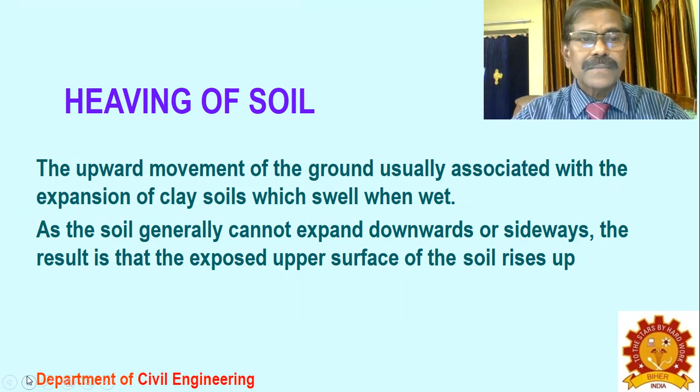Heaving of soil means the upward movement of the ground, usually associated with the expansion of clayey soil, which swells when wet. As the soil generally cannot expand downwards or sideways, the result is that the exposed upper surface of the soil rises in its level. As a result, the soil swells abnormally, which causes damage to the foundations. So this we call heaving of soil.

There are different types of heaving. The shrinkable clays, or soils containing a large portion of mineral particles less than 0.002 mm in diameter, produce an extremely cohesive soil type when wet, but shrink to a crumbly, crazed structure when dry. This expansion and contraction process during wet and dry periods is known as clay heave.

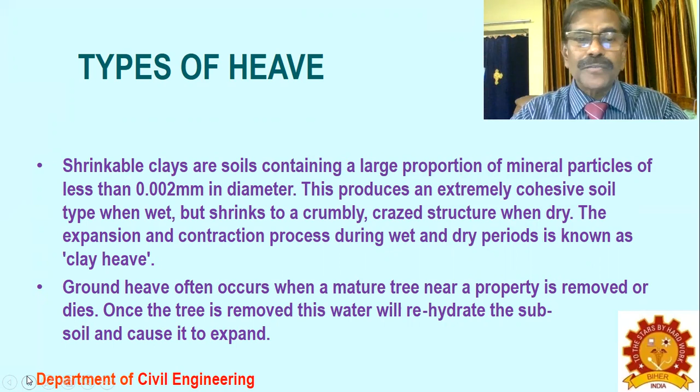Ground heave often occurs when a mature tree near the property is removed or dies. Once the tree is removed, water rehydrates the subsoil and causes it to expand, because the soil moisture used by the tree is no longer being used. As a result, the soil swells and causes damage to the foundations. So these are different types of heave.

Heave prediction: how do you predict the heave? What will happen when the structure is constructed on heaving soil? How does the expansion of the soil take place, and what are its implications on foundations? These things can be identified if you know how to predict the heave.

Reasonable estimates of anticipated vertical and horizontal heave and differential heave are necessary for the following applications. What are the applications? Determination of adequate design of structures that will accommodate the differential soil movement without undue distress.

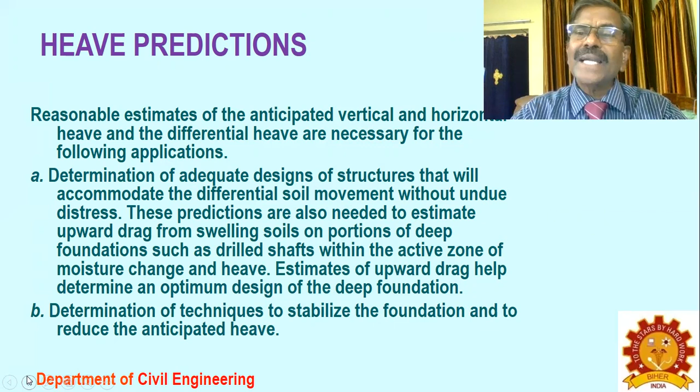Undue distress means no cracks are expected or visible cracks should not be seen on the structures. These predictions are also needed to estimate the upward drag from the swelling soil on portions of deep foundations, and to determine techniques to stabilize the foundation and reduce the anticipated heave. So that's how heave prediction becomes essentially needed.

Factors influencing heave: the difficulty of predicting potential heave is complicated beyond these factors by the effect of the type and geometry of foundation, depth of footing, and distribution of load exerted by the footing on the magnitude of the swelling expansive foundation soil. So these are some of the factors which severely influence the heave factors of the soil.

Additional problems include estimating the exact location that the swelling soil will heave, or the point source of the water seeping into the swelling soil, and the final or equilibrium moisture profile in the area of the heaving soil.

Heaving soil is generally fine-grained soil of varying types, like clay soil, peat, or black cotton soil. This will swell abnormally when the moisture content increases, because the increase in volume cannot be accommodated below the earth level. It expands on the surface of the soil, pushing up the structure standing on it, causing undue damage and cracks in the building. That is what you call heaving of the soil.

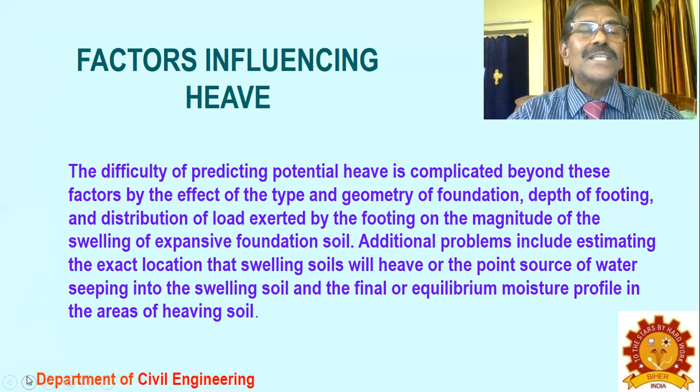This can happen when a tree is cut down, or when moisture is lost, or when extra moisture is added. Then you will feel that the heaving of the soil has an effect on the structures.

The method of heave prediction: how can heave predictions be done? There are two or three methods available. We cover broadly one or two methods here. Basically, they are all empirical methods.

The foundation soil may expand both vertically and laterally. The vertical movement is usually of primary interest—we are much more interested in it than the lateral movement, which can be accommodated by the structure—because it is the differential vertical movement that causes most damage to the overlying structure.

As I said earlier, the vertical deformation or swelling of the soil has a direct effect or impact on the structure sitting on it, as a result of which the structure is badly affected. So we are very much interested in the vertical heaving, which is sometimes called the heave potential of the soil.

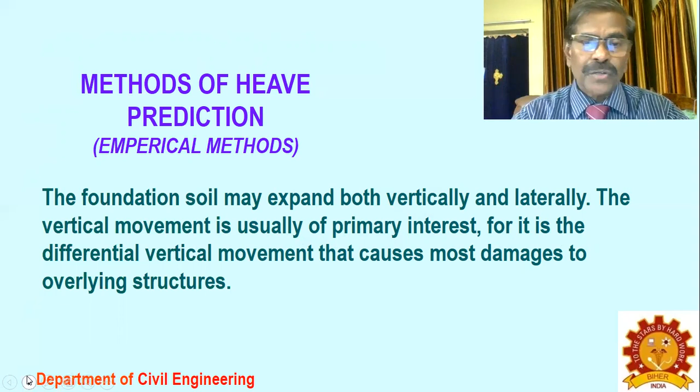Methods of heave prediction, the vertical movement. The methodology for the prediction of the potential total vertical heave requires an assumption of the amount of volume changes that occurs in the vertical direction.

The fraction of volumetric swell, or N, that occurs as heave in the vertical direction depends on the soil fabric and anisotropy. Anisotropy means there can be a differential expansion or differential swelling possible in the soil. So in the vertical direction it may be more, in the lateral direction it may be more, or sometimes it may be vice versa. You call it anisotropy.

The vertical heave of the intact soil with a few fissures may account for all of the volumetric swell, such that N is equal to 1.

While vertical heave of the heavily fissured and isotropic soil without horizontal restraints on the soil swells that exist in the field, a one-dimensional consolidation swell test can predict the heave very nearly to the accuracy.

So the consolidometer used for heave prediction is also termed an oedometer. The oedometer is used to predict the swell of the soil. Let us see how this is predicted using the oedometer.

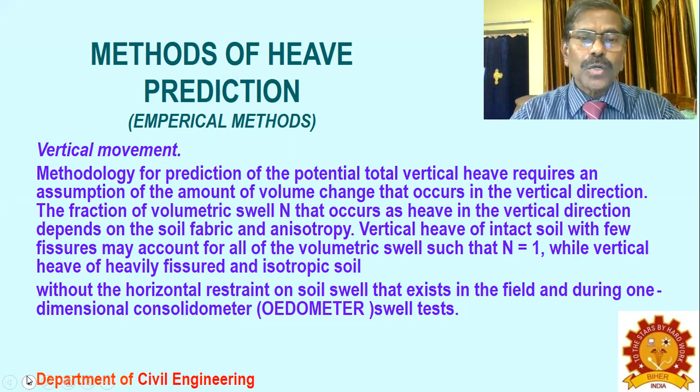An oedometer is a device to find out the vertical swell of the soil. The soil which is required to be understood should be kept in a ring specimen. So what you call the test sample, this is a ring, in the form of a ring. Inside the ring, the test sample is kept.

Then a load is applied, a calculated load, so that the soil is under stress. This simulates the foundation stress on the soil. It is just to simulate the foundation load on the soil.

Now the loaded soil is supplied with water or moisture content, so that the moisture content increases and the swell increases. When the swell increases, there is an increase in elongation along the vertical direction. The increase in vertical elongation divided by the original length is called the strain in the soil. So there is a stress in the soil, there is a strain in the soil, and there is a water content in the soil. All these three parameters are measured in the oedometer.

This is another, simplest form of the oedometer. This is a more expensive form where the moisture content can be controlled. Here you send the moisture control through a porous media, and the porous media controls the pressure of the soil and water content, which is then taken out by a drain pipe from the porous media. That is how the drainage path, or drainage, is controlled in the test specimen.

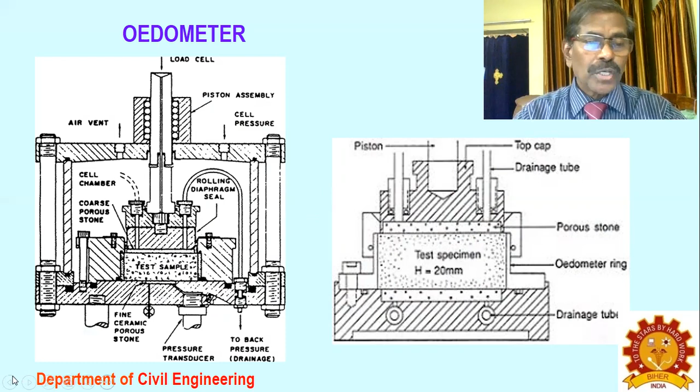The oedometer test and the heave prediction. Numerous numerical methods have been developed for the estimation of heave, or swell, in the vertical direction.

But few of these methods have been validated experimentally, and there is a limited amount of experience regarding the reliability of the available prediction methods. Though a lot of empirical methods are being adopted, the reliability is very limited, applicable for certain items only, certain values with certain procedural usage of the equipment.

Those one or two reliable methods we are presenting here for the oedometer test to predict the heave. This is a popular test for measuring swell potential and swelling pressure, and the testing equipment is commonly available in most soil mechanics laboratories. Due to the simplicity of its operation, most geotechnical engineers are familiar with the testing method because it is very similar to the consolidometer.

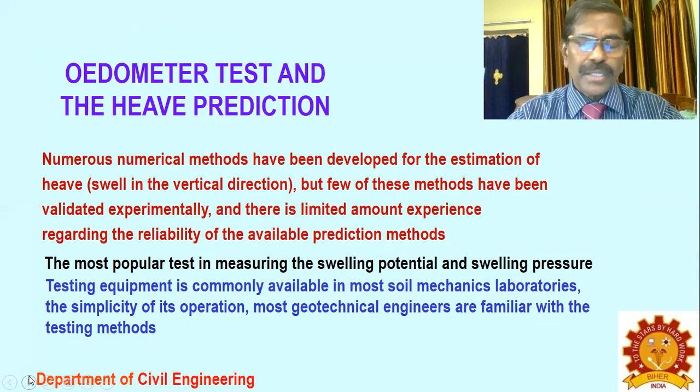The consolidometer is used to find out the initial settlement and final settlement of the soil. It is very nearly equal to that, and it is called the oedometer because it is used for predicting the heave of the soil, not exactly the consolidation.

The heave prediction method: the Marr et al. method. 'Et al.' means other authors' work is also involved. Marr et al. proposed a practical method to predict the vertical movement, or heave, of the soil based on the change in water content. A simple method for predicting the vertical strain, epsilon V, as a function of change in water content, delta W, at a given total applied vertical stress.

At a given sigma V, the vertical movement delta H can be found, which is the ground surface movement, equal to H naught, the thickness of the soil layer, multiplied by delta W, the change in water content, and C epsilon W, the slope of the swelling line.

The slope of the swelling line, you get it from the oedometer. Let us go into the depth of the subject, how to find out the slope of the swelling line.

This is one of the components used in the Marr et al. method. Along with that, you use the ground surface movement and thickness of the soil layer, then change in water content to predict delta H, the ground surface movement.

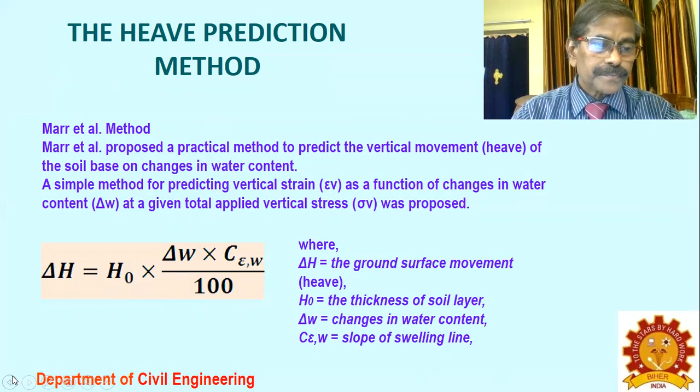That formula, if you are interested, see epsilon W. It is not E, it is epsilon W. So that is the slope of the line CH.

We can use 3 specimens at a time to get the heave prediction values. This is another oedometer. You use it for the purpose of finding the heave predictions.

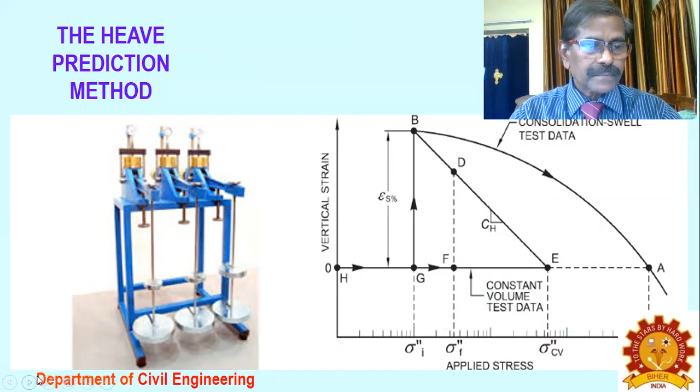There is another method called the Nelson et al. method, wherein CH is equal to percentage of S times log of sigma prime CV over sigma prime i A. And delta H again uses the CH value here.

It's log of sigma prime CV and sigma prime VO, which is a stress level. Then H is the thickness of the layer. CH is a constant from the oedometer test.

This is that value. Percentage of S is the percentage of swell corresponding to a particular value of sigma prime, expressed as a percentage. CH is a heave index, and sigma prime CV is the swelling pressure from the constant swell test.

Sigma prime V naught is the vertical stress at the midpoint of the soil layer for the condition for which the heave is being computed. So there is V naught, sigma CV, and the swelling pressure from the constant swell test.

Using these stress values, the log value is taken as a constant. Along with CH, the slope of the line, and the thickness of the swelling layer, you multiply to get delta H, which is the swell potential or swelling value for the soil.

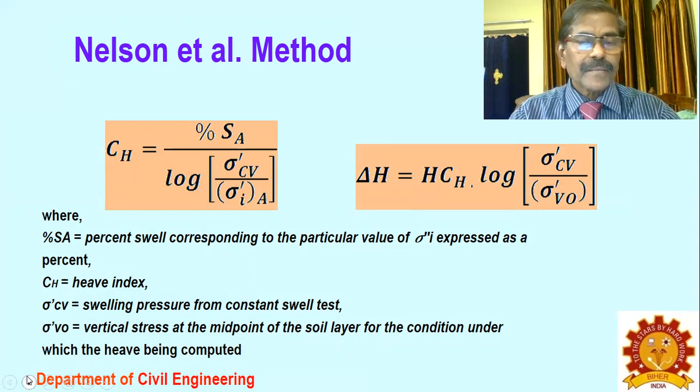If you change the water content with an applied stress, for example 3.3 kilopascals, you apply a load, shown along these lines.

If you apply some load and then increase the water content of the soil in the oedometer, swelling will take place. The increase in vertical height divided by the original height of the soil specimen gives the vertical strain of the specimen. For example, at 20% moisture content you measure the strain.

At 25% you measure the strain, and at 30% you measure the strain. You plot these and draw an average graph. It is a straight line graph.

Now you apply another load of 8.8 kilopascals. You again plot this and get another line, the black dots. Then you increase the load to 12.5 kilopascals, and again increase the water content to get the vertical strain.

You get another line. So as the vertical stress increases, the slope of the line decreases, which tells you that when the vertical stress is very heavy, swelling is automatically arrested because of the very high pressure from the other end.

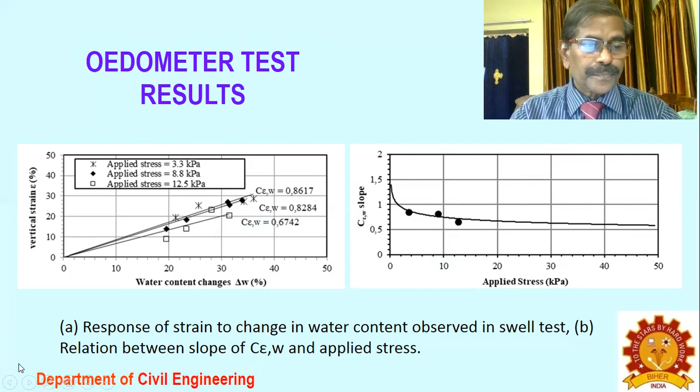If you use some of these methods, you can draw a comparative graph for research purposes. HEAVE occurred on the test, and on the test you can get some value. What is HEAVE occurred? There is another test, prediction of HEAVE using the Nelson et al. method, and prediction of HEAVE using the Marr et al. method. If you compare, they are very nearly equal.

So the Marr et al. method, actual experiment, as well as Nelson et al. method, very closely follow the experimental values. So we conclude these two methods are more reliable to predict the HEAVE or HEAVE potential of the soil. That's why we are studying these two methods to find out the HEAVE potential of the soil, because they very closely follow the actual values.

The comparison of the HEAVE profile throughout the depth of the soil between the predicted and measured values are shown in the figures.

Now, what are the effects of HEAVE? That is about HEAVE. When a HEAVE takes place, what will happen to the soil? What will happen to the structure? Let us see one by one.

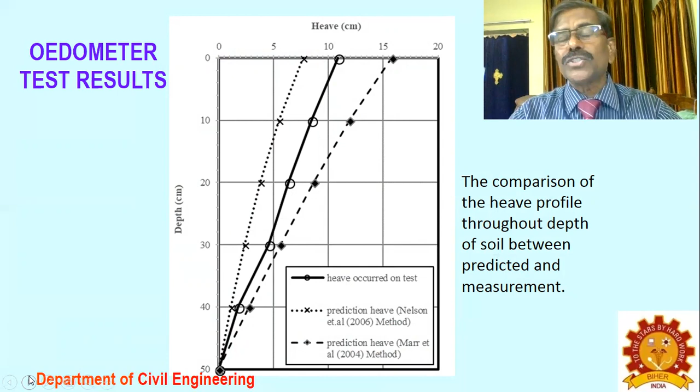This is about the theory of heaving, but we should know, as soil mechanics engineers or geotechnical engineers, what are all the implications on the foundations.

Now, the oedometer test gives some list of conclusions. The advantage of the Marr et al. prediction method is that it can be made using only the water content data, resulting from fairly routine geotechnical laboratory tests. Yes, you can do it. Most geotechnical engineering laboratories are well equipped with the setup to run the test.

But the test procedure takes a long time - long time meaning 14 to 15 days. It is not measured in 1 hour or 2 hours; it is measured in number of days.

To set up and run the shrink swell test, the test procedure needs a lot of specimens that are identical, and it is difficult to ascertain whether the specimens prepared are identical. So preparation of the specimen is very, very important, because to predict swell, you have to do a series of tests, changing the stress level and finding out the strains for different water contents. Because of that, your specimens should be consistent.

So when you prepare a mass of soil, from there you take small pieces to make small cakes, which will be used in the oedometer. The test procedure needs a lot of specimens that are identical, and it's difficult to ascertain whether the specimens prepared are identical. You have to assure it.

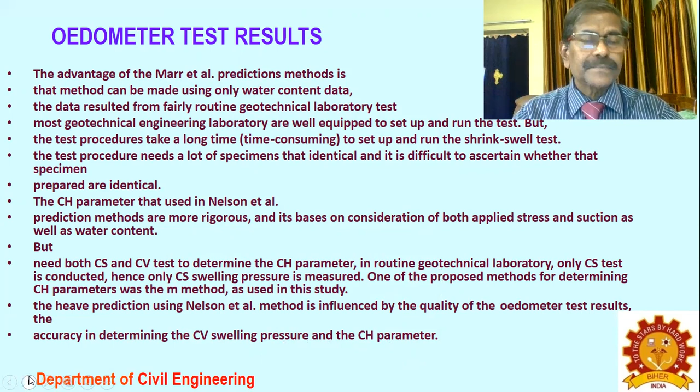Soil degradation and conservation. Because the soil is heaving, there is movement of the soil, and it has to mix with other materials surrounding it. Then it has to be exposed to the weather, receiving dust particles and other materials carried by wind and water. As a result, the soil sometimes gains fertility, sometimes loses it. Most of the time it becomes degraded because of weathering.

So when the soil heaves and then shrinks, you get a lot of cracks like this, and soil degradation takes place. This type of degradation should be conserved by having vegetation on the surface - green vegetation on the surface. So cutting greenery is never good for any aspect.

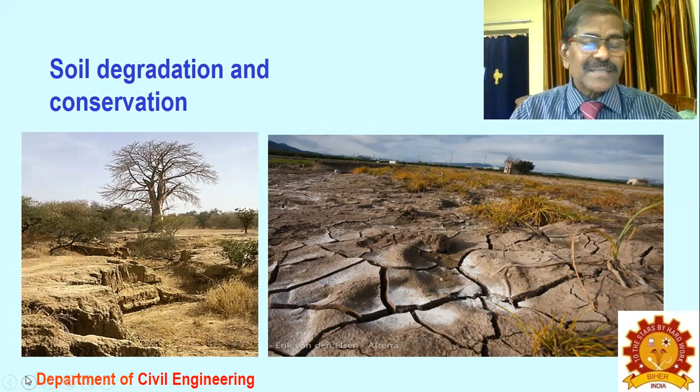Soil ecosystem changes through the succession. The fertile soil contains the community of organisms that work to maintain functioning nutrient cycles. These communities help to keep the soil resistant to erosion.

For example, the bare rock leaches, that is, it gets weathered and becomes smaller. Small annual plants and lichens can grow there when there is stagnation of water. So maybe algae, fungi, things like that. Then the next stage is grasses and perennials, which live permanently on the surface of the earth. Then you go to larger trees, intermediate species, grasses, shrubs, shade-intolerant trees such as pine trees. Then shade-tolerant trees, and the climax community starts.

So the primary succession of the soil starts from the rock and goes to fertile soil. But when soil healing takes place, it goes back to lichens and small annual plants, or it goes to eroded soil, or unused, not usable soil.

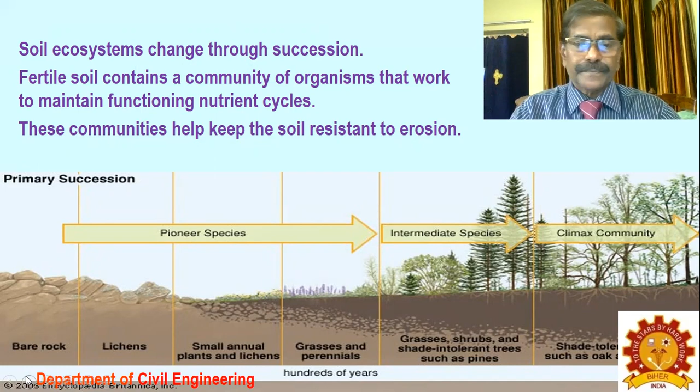Two main types of process can give rise to soil degradation. What are the two things? The process that takes away the soil - erosion, with no or little vegetation on the soil, and wind and water. They do a lot of work on the soil - work of wind, work of water, work of air. The other process makes the soil less suitable for use, through loss of chemicals and nutrients, leaching, addition of chemicals, and pollution.

Generally, commercial industrialised food production systems reduce soil fertility more than small-scale subsistence farming. So these are some of the effects of soil degradation because of soil heaving.

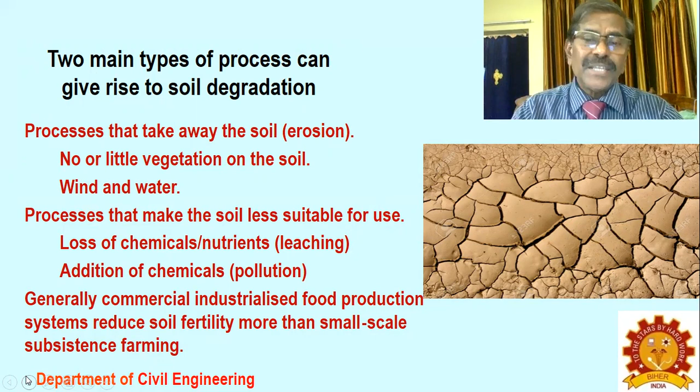Erosion is the movement of soil, especially the surface litter and topsoil. Two main agents of erosion are wind and flowing water. So maybe the river, when it meanders or when there is scour in the river, then the soil will be eroded away and deposited again with some other soil. As a result, soil fertility may increase or sometimes decrease. So the soil may be eroded and become less fertile also.

Soil erosion will become like this - green vegetation will be spoiled here. So if any heaving of the soil occurs, such things will happen. Because of very heavy wind, the topsoil gets eroded away, and sometimes useful materials and degraded material used as fertilizer can also fly off along with that.

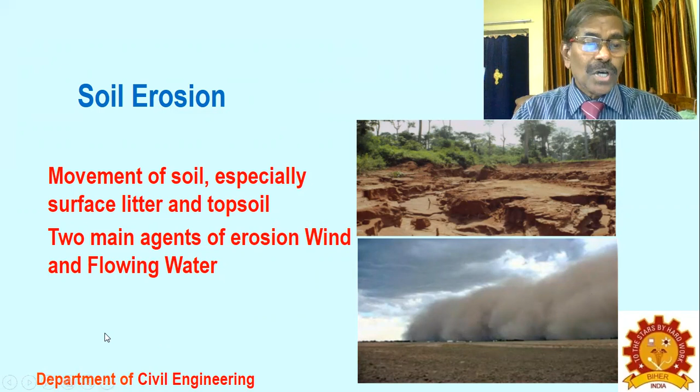Toxification - industrialization has started all over the world, increasing soil acidity caused by leaching of metals, burning of plant material, pH value changes, and coal power plants. The coal ash and fine handling ash get mixed with soil, and the soil gets degraded very badly. Toxification is very dangerous for the soil, and not only for the soil - for living beings also it is very dangerous.

Please bear in mind, toxification is never good for any part of the earth. But you cannot live with toxification.

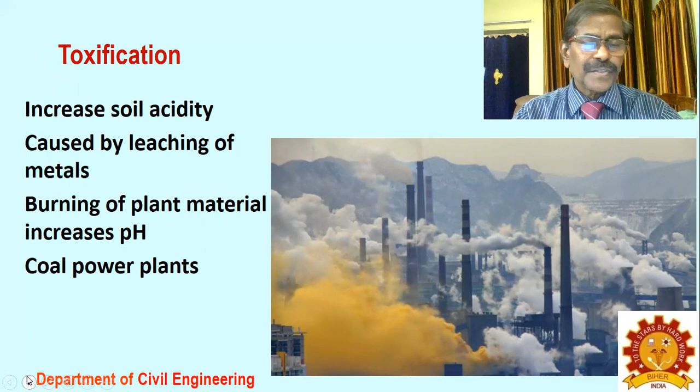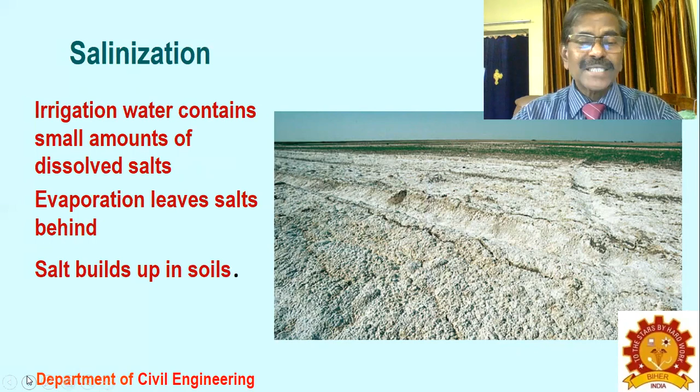Salinization is deposits of salt from the seawater. It deposits and spoils the water, and spoils the soil, because all the salt - which may be magnesium and other calcium carbonates - gets deposited, and some amount of potassium also gets deposited in the soil. These are all very bad for living things, and very bad for foundations also. You cannot put a foundation on salt, because that will spoil even the reinforced concrete. So whatever is not good for us is not good for the structure also - please keep that as a general formula in mind. Salt built up in the soil is never accepted as good foundation soil.

Gullying - you might see some potholes on the roads, but it happens at very large diameter in barren land, you call it gullying. The channel develops on the hillside, then following rainfall, over time, they get deeper and deeper.

As I was talking about swelling, when swelling stops and shrinkage takes place, the soil may move upward, then at the bottom side there will be empty spaces - a vacuum being created. That vacuum gets occupied by landslides. So when such things happen, gullying happens like this. When there is a landslide, the swelling soil swells abnormally and removes some material. When the swelling soil contracts, it replaces the soil at a deeper level, which creates something like gullying or potholes. Potholes are very small magnitude, but this is a very big thing, like a valley.

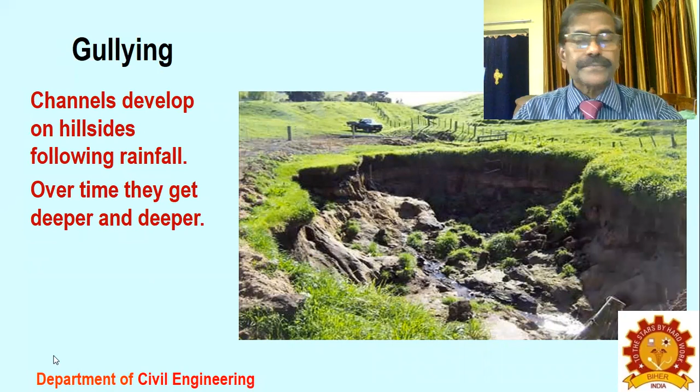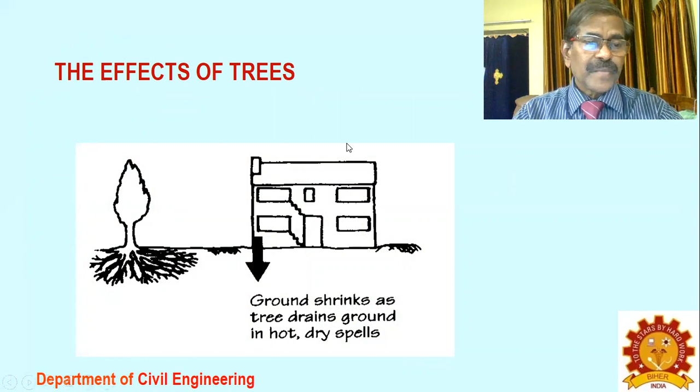When the ground shrinks, the tree drains ground moisture. So the trees always keep some of the moisture content. If you cut off the trees, then the ground can swell or heave once the tree is felled, because whatever water was being used by the tree through the roots is no longer being used.

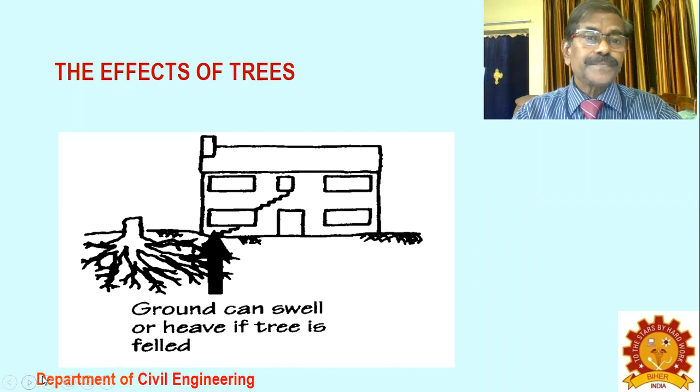With the result, the soil gets swelled because of that moisture content, which causes cracks in the building. When the soil goes up, there will obviously be some moisture content in the soil. So these are all effects of cutting trees, causing swelling and so on.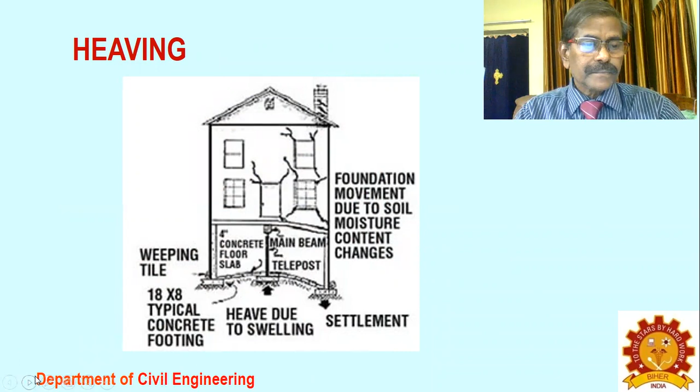Sometimes the damage can occur like this: the flooring cracks and the column gets lifted up bodily, and there could be a crack on the side walls also. This you call the heaving failure.

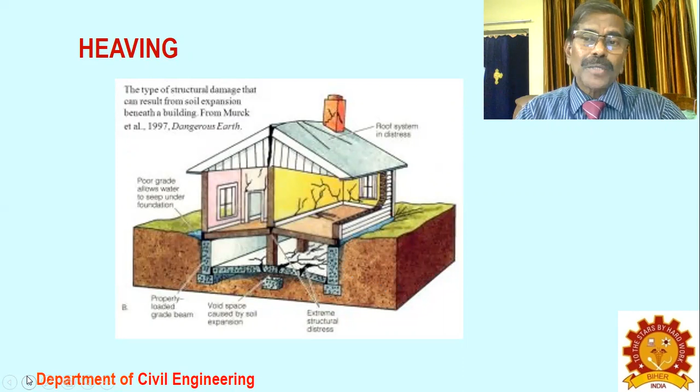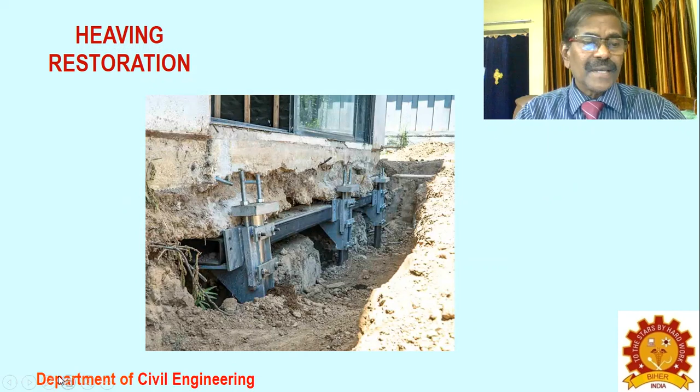This is a very small type in magnitude. A macro size of these problems can also occur like this - a very big structure can be swelled, heaved and then swallowed by the soil, and it has to be underpinned like this. Very big structures can also fall because of soil heaving.

So a raft foundation can be tilted like this because of soil heaving, and it is not uncommon if you put a raft on black cotton soil or heaving soil.

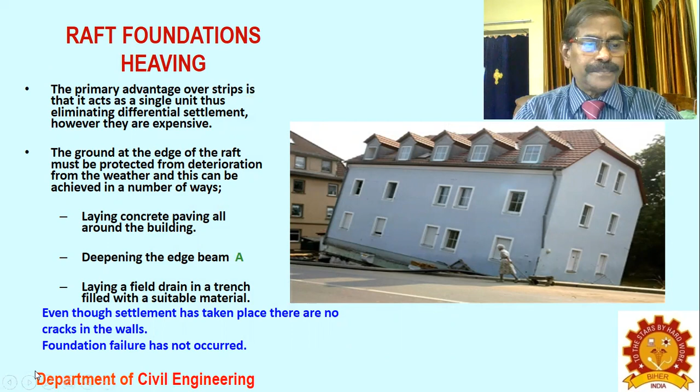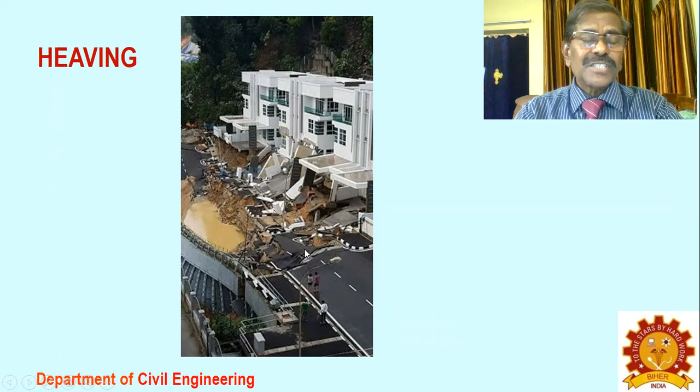So very big structures or retaining structures can be heaved very badly, pulling down the structures. So you have to protect it with some other material to ensure that the heaving of soil is stopped.

When the soil heaves like this, if you allow it to heave, the full structure will have to come down - you don't have any other choice. Only thing is, it may be time bound activity, so it gives enough warning for the people. The life of the people may not be lost, but the structure will be lost, which is also a very expensive loss.

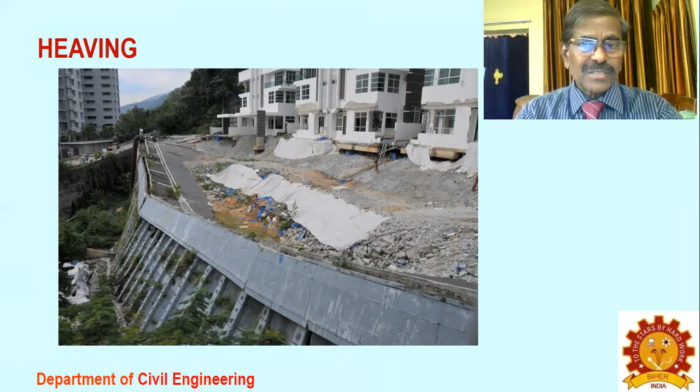So your total structure can develop multiple fractures in the entire structure, and finally it can come down in twisted form like this.

A bunker and silos can be pulled down because of heaved soil, and you may think that soil can be loaded with bunkers to compress and keep it intact - not necessarily like that. Differential settlement and differential heaving can cause the structure to fail and collapse like this.

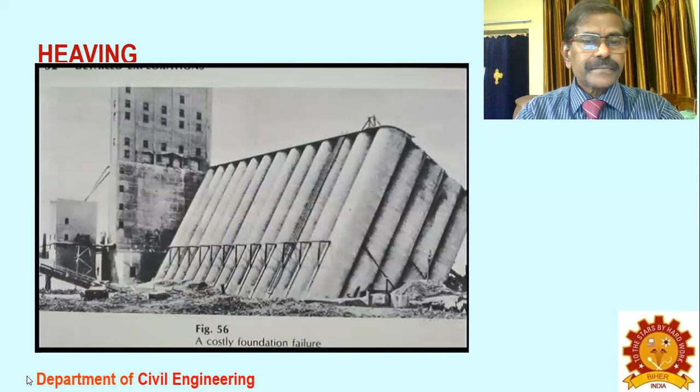To protect against this, you have to have a cofferdam or sheet piles driven near the heaved soil so that the soil doesn't heave further laterally. Lateral heaving can cause subsidence of the structure at different places. To avoid lateral heaving of the soil, you develop the cofferdam with strong piles and cast it, so you can retain that earth and stop the heaving.

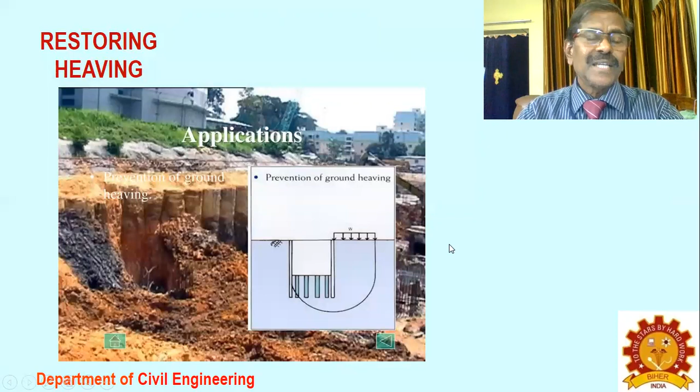Heaving doesn't have to be measured only in the area where you construct a building. Suppose a very big hillock or rock mountain is there - heaving can take place, causing very big crust formations of the earth to heave like this, or it can heave on either side and open out, showing what is happening inside the heaved part of the soil.